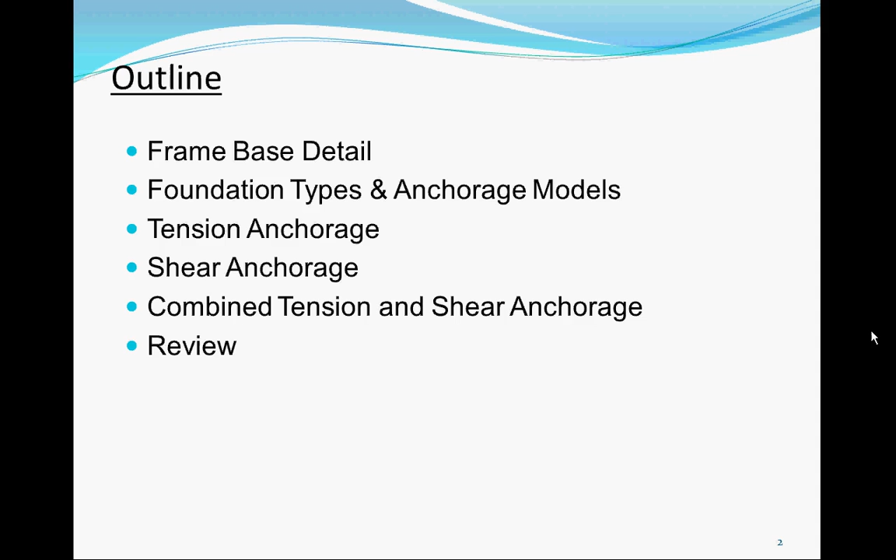Okay, we'll do the frame base detail, and then followed by the different foundation types and anchorage models. We'll see what we do with tension anchorage and shear anchorage, and then how we handle combined tension and shear. Okay, and then followed by review.

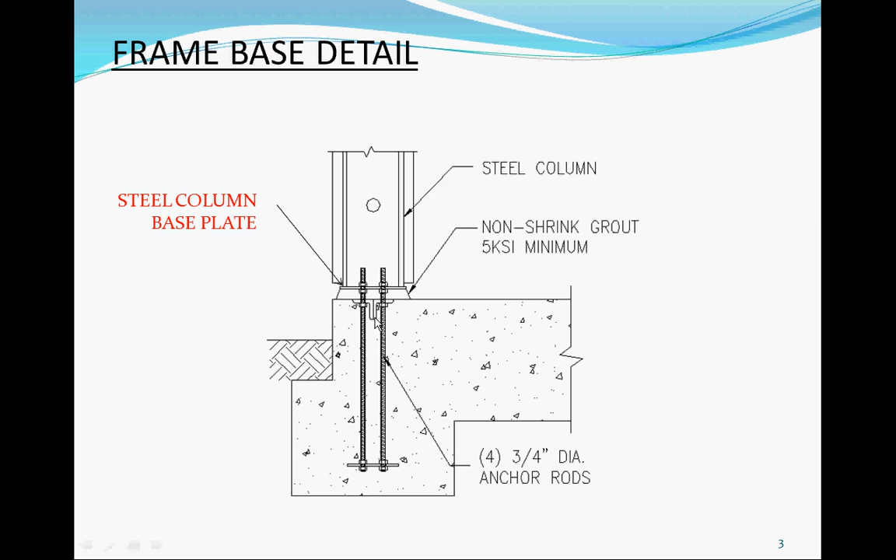So our frame base detail is what we're trying to do, which is basically anchor our frame down to concrete. The basic setup for the SMF is four 3/4 inch diameter anchor rods. We have a non-shrink grout underneath the base plate. Okay, here's the steel column, and here is the steel base plate. So there's a grout underneath it. This is the angle that I was talking about. You guys just saw, depending on what model, this would or would not be there. And the purpose of it is for shear, and I'll go into that when we do the shear anchorage.

So for the base plate detail, we try to keep this somewhat close to 3 inches. Again, we mimic the pin behavior, like what we talked about. The holes are typically 1 inch. These patterns are 3x3. However, on one project we had a big column, and the web was pretty thick, so we actually had to spread this out to, instead of 3, I think like 4 or 5. This column was like 12 inches or something; it was very wide when we had to size it. So this dimension, you could probably keep at 3. Go in that direction. If you detail it, then they will fabricate whatever you need.

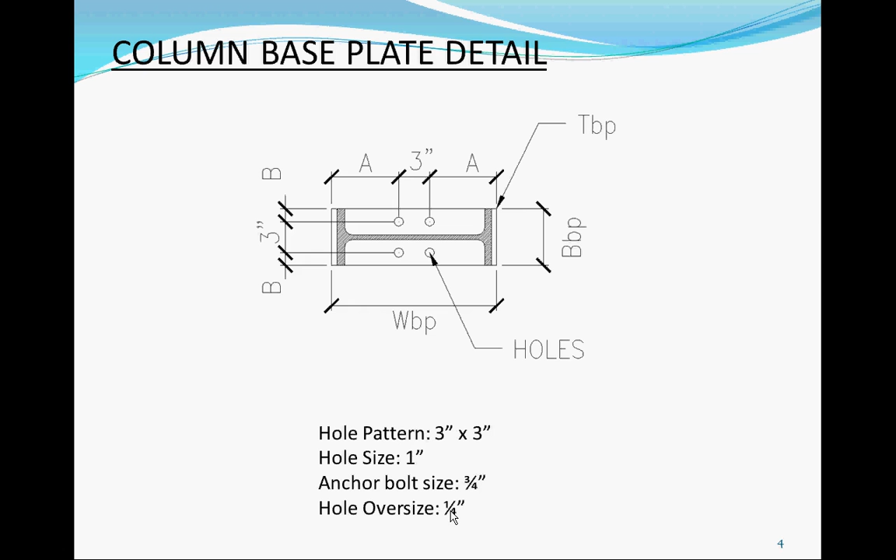Okay, so the basic pattern is 3x3. The hole size is 1 inch. The anchor bolt is 3/4, so you can see our holes are oversized by 1/4 of an inch. For a typical bolt connection, not the anchor bolt, but a typical bolt for steel beam and column construction, the hole size is 1/16 over. They allow a bigger hole size for the base plate because of anchor bolt tolerance. Anchor bolts are not always straight, they're always out of tolerance, and they cast it wrong. That's why we also offer a kit, because we want them to be pretty fixed from one to another. So we sell two, one on one end, one on another end. When they cast in the concrete, this is all buried. All they have to do is drop the columns in here, tighten the bolt, and that's good. Okay, so that's the base plate detail for the bottom.

We have a lot of different conditions. This is the slab on grade. This is taken directly from the software. You've seen it before, but I just want to utilize this to show some of the elevations of what they look like.

So for the slab on grade, we have two solutions. We have the MFSL and then MFAB. MFSL, MF is the moment frame. We used to have OMFSL, but we condensed it so we could use it for both lines. So now it's MF, moment frame. SL is shear lug. Shear lug is this thing. I'm calling the angle the shear lug. Shear lug. Yeah, I'll show you the spelling later. It is a lug, so shear lug.

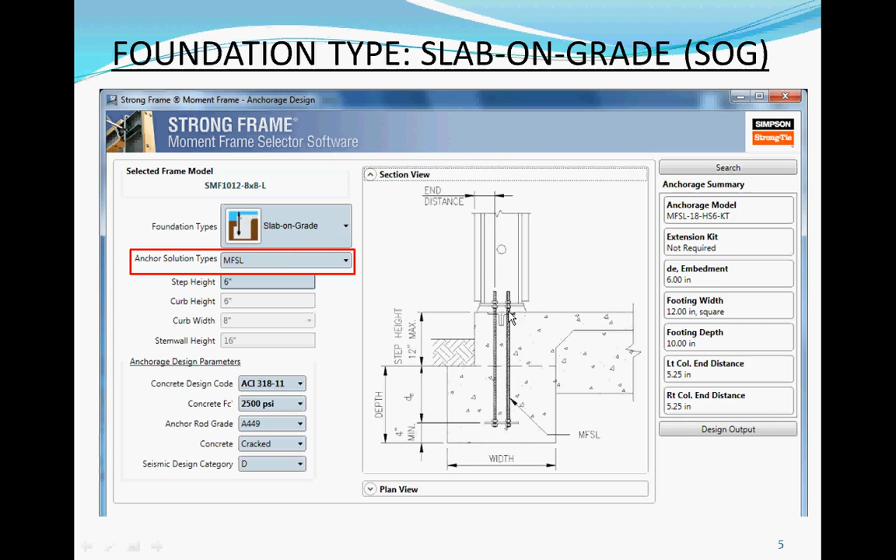Next one is a curb, kind of a garage front or kind of a wall when you're looking at it. When you put it on top, the curb is short. When you talk stem wall, it's a little taller. That's why we have a couple of differences.

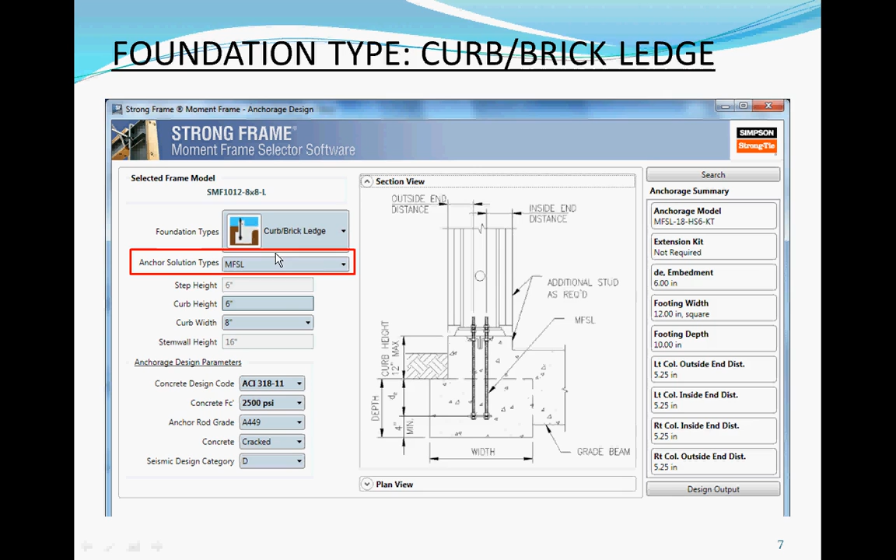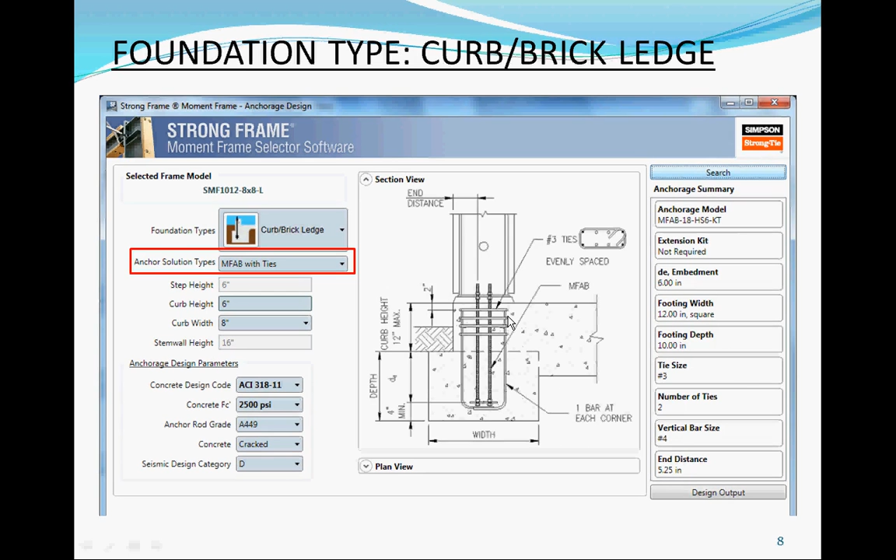So MFSL as well, and when you have a tall curb, now you're not only transferring shear per se, we're looking at it as a kind of cantilever column, almost a little concrete column. Then you're looking at, especially when you're bearing in that direction, compression a little bit, and your concrete is not helping. This is your tension rod. Now I'll go through and see how we actually calculate some of these anchor capacities.

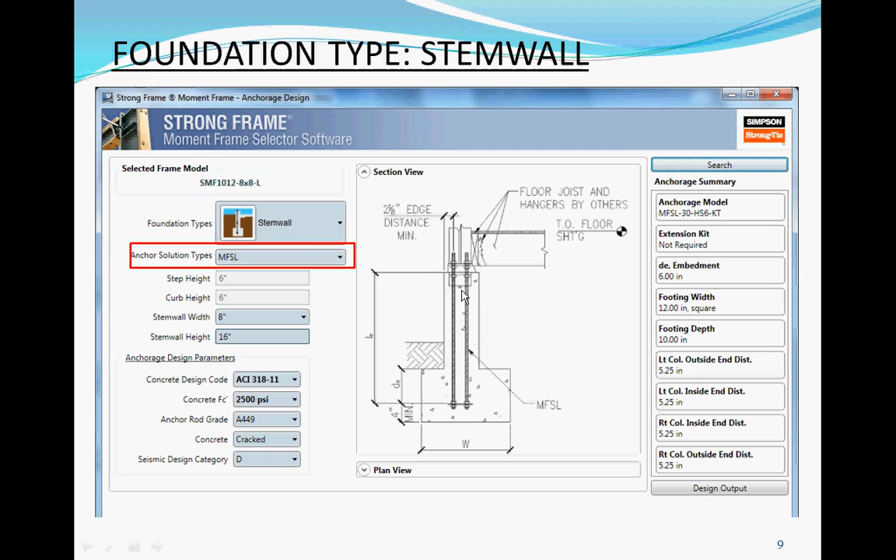For your tall ones, a stem wall. Stem wall is very tall compared to your curb. They start out with like 30, 36, 48 inches, whatever, or even more if you do it for a basement wall. So on this one, we only offer the MFSL solution because the ties and the wall bars, they could probably use it and account for the wall bars for the shear transfer. So we only offer this one. Two solutions: the MFAB,

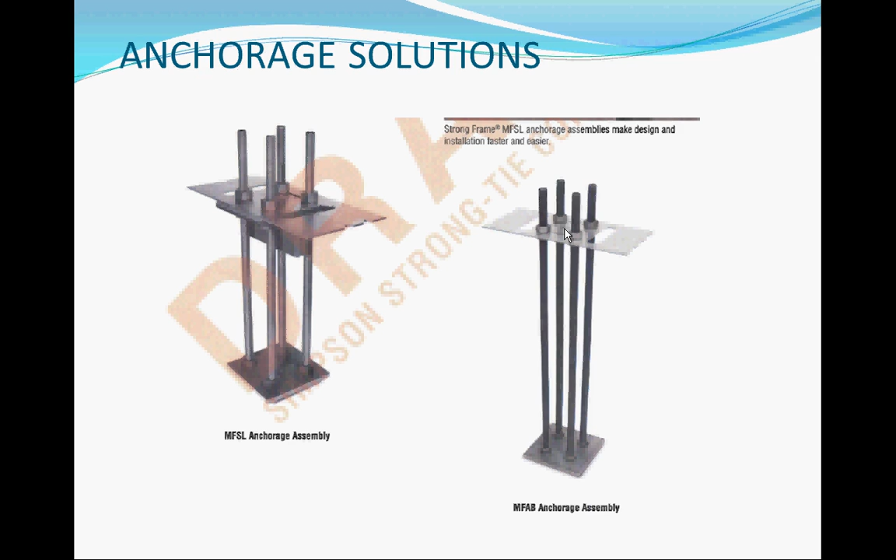MFSL, as you see, very much similar, except for the only thing on the side, the placement for the job site. So we have some slots here. There's only one slot now, the center slot. They actually take a measurement from one end, then from another end, to locate their center spacing. And this one you don't see because somebody put a plate on the top, but you can also use these as handles to carry it. So that's what they are locating.

I'll cover tension anchorage first, followed by shear, then tension and shear. For tension, essentially most of the components are per ACI 318 Appendix D. 2008 or 2011, I don't think there's much difference for our concern, so I'm just going to say ACI at this point. The first one is embedded plate bending, and that's the AISC calculation. The embedded plate is the bottom plate down here.

So we're pulling on it. That's bending. If you imagine this plate to be wide apart, when you pull on it, the plate is going to bend. So the first mode is bending per AISC. The second mode is the steel capacity. The third is concrete breakout, followed by pullout and side-face blowout. All these are directly from ACI 318 Appendix D.

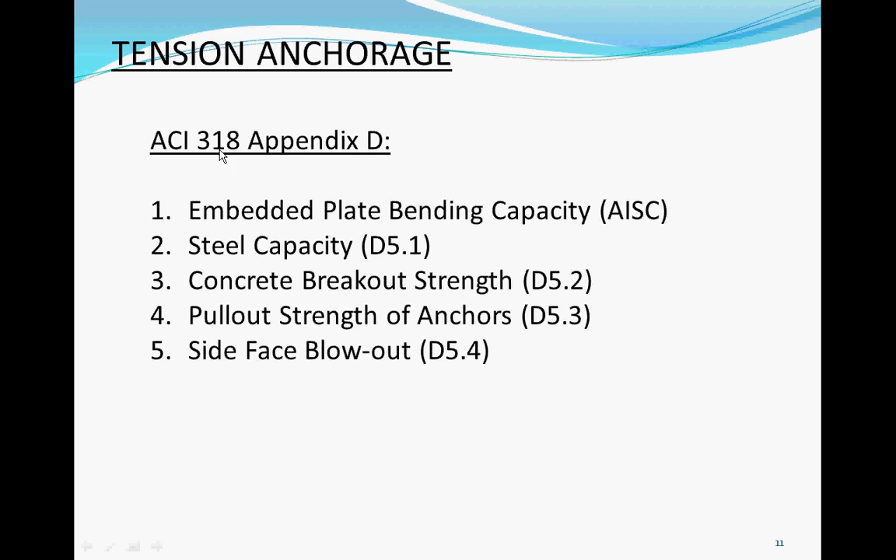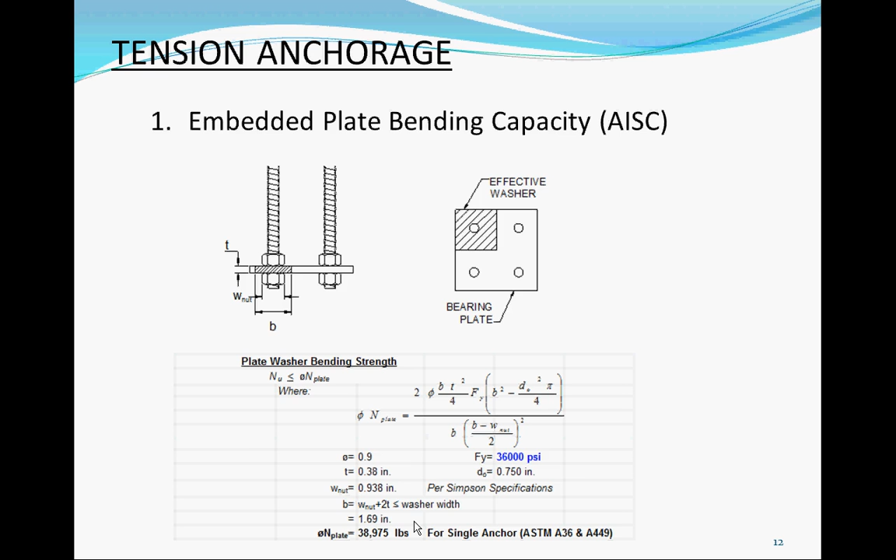The first one, capacity in tension, is the embedded plate. What we're trying to do is treat it as a kind of standard washer. We have an equation to calculate it, and then here is the load per anchor. We have a 3/8" plate, so it's actually 0.375, and these plates are A36, so grade 36, and the capacity for this per anchor is 38, almost 40,000 pounds. So times 4, it's a lot of capacity. This mode does not control compared to the other modes, but we still have to show the calculation and the capacity.

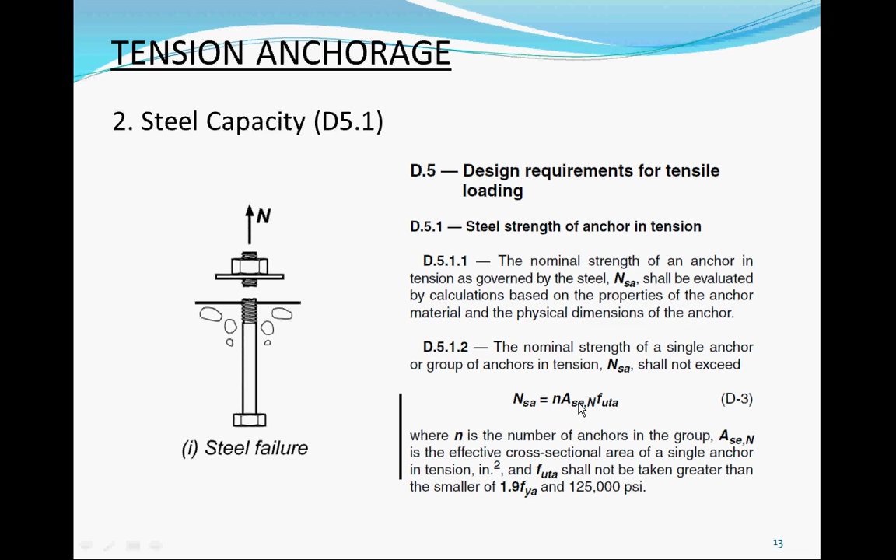The second mode of failure is steel capacity. This is directly from ACI, just showing you what they are. So 5.1 is steel failure, and basically it's N times Ase times futa. The difference between ACI and AISC is that for this A, you have to account for the thread, so they publish that area, versus AISC, when they say bolt, they just account for the non-reduced area. These are the two differences between the two agencies in how they view the area. For Fu, ACI does not reduce by the 0.75, so whatever Fu they publish, you use the true Fu. So pretty easy: number of anchors times effective area times futa is your Nsa. That's the steel.

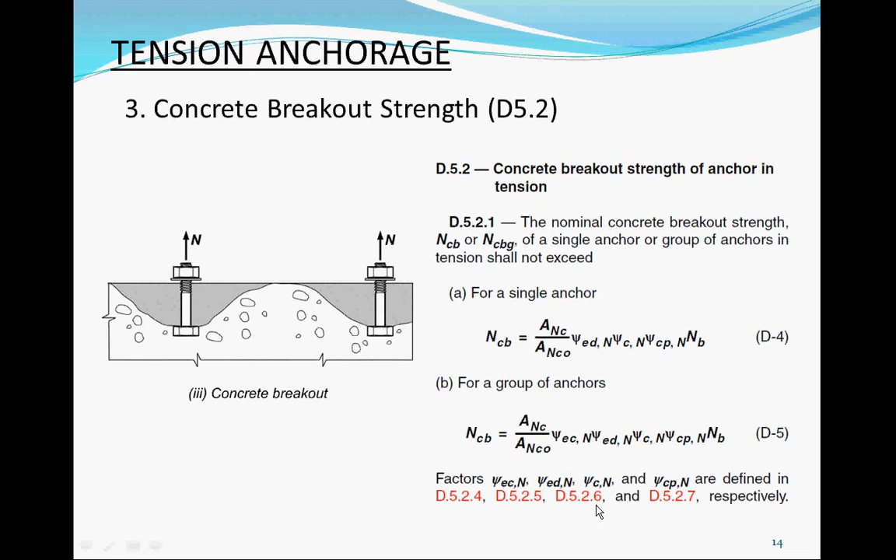Concrete breakout is when you're basically breaking out the concrete. This is a lot more involved, with a lot of factors associated with spacing, group behavior, and all that. So that's D 5.2.

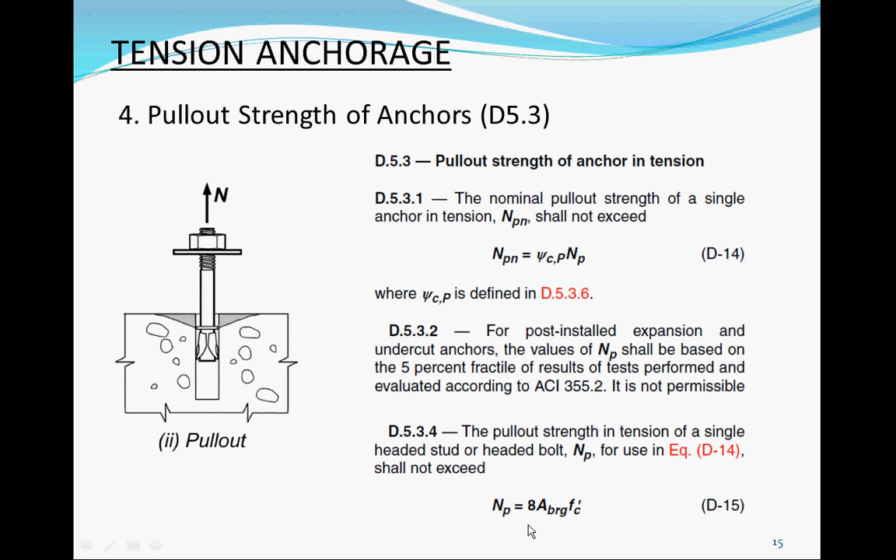5.3 is the pullout. For pullout, basically the NP for a single headed stud, they give you an equation for what that is.

For blowout, 5.4, if you're close to the edge, this could come out. That's blowout. For shear anchorage, okay, that's it.

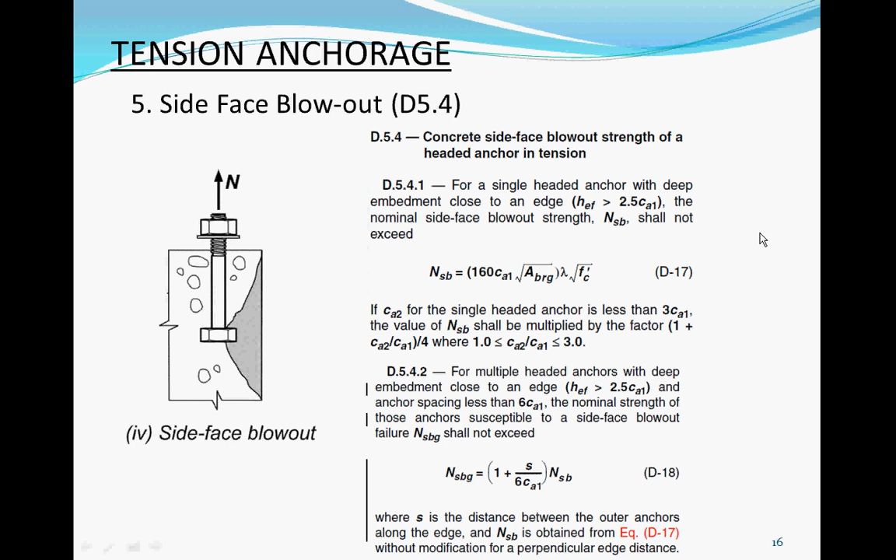I didn't show you how to calculate, but we also have a spreadsheet embedded into the base plate design, so you could take a look at it to make sure it works. It hasn't been back checked, it's just for my own calculations.

For the shear lug anchorage, you have AISC Design Guide 1 for the shear lug, so MFSL is that. MFAB stands for moment frame anchor bolt, so no shear lug - very innovative naming.

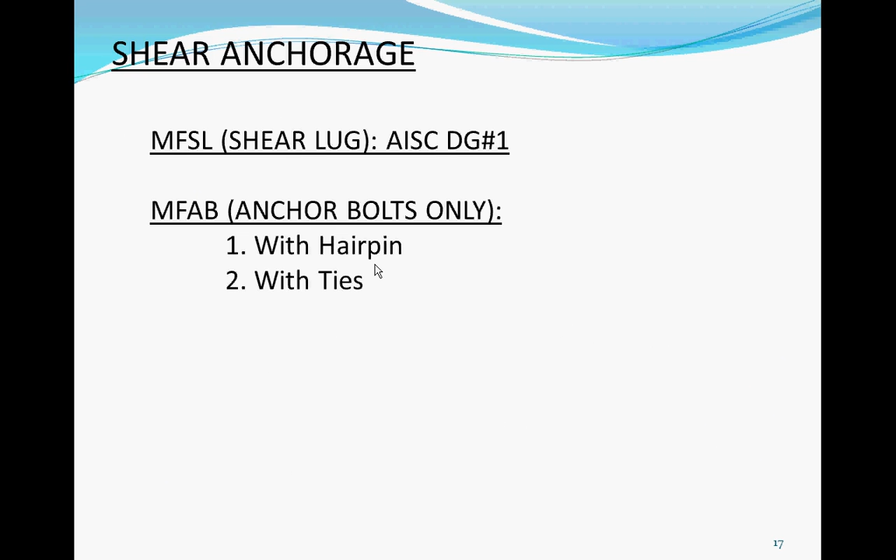Anchor bolt only - this solution you could do it with hairpins or with ties. Hairpin is when you bend it in the field, in the slab. They call it just a pin, like a loop - we'll see what it looks like. And then this is ties, ties usually tie around.

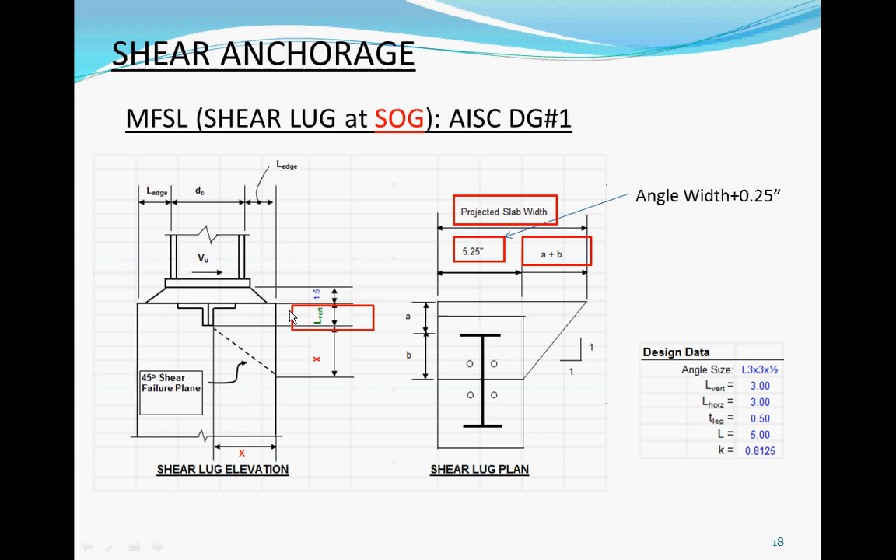For the curb, it's pretty similar. Instead of projecting out, we're limiting this to the width of the curb. So you can't go more than the width of the curb.

For shear anchorage, like I said, we have a design spreadsheet that takes care of it. You'll have to adapt it to your design - I'll show you what to do. Maybe even update some of these like OMF numbering on the spreadsheet.

So calculate the effective width, calculate your design guide with the bearing, the pressure, X, the edge distance. Here's the shear area, AV. We have step by step that spells it out, and on the bottom I'll show you in the spreadsheet - it's easy to read. We have all these noted, step 1, step 2, across to show how we got those capacities.

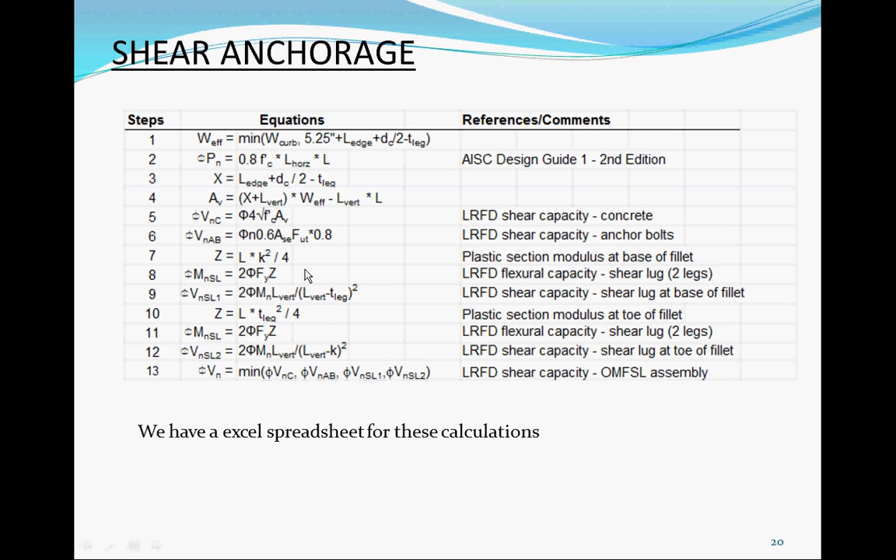So we check the angle at the base of fillet, we check the angle at the toe, and then we check angle bending capacity. Basically, all these checks are per Design Guide 1 and AISC 360.

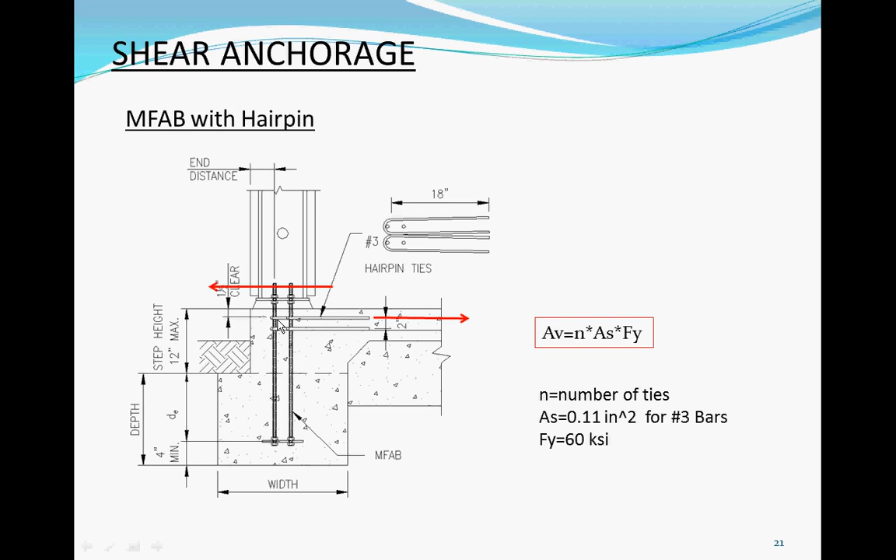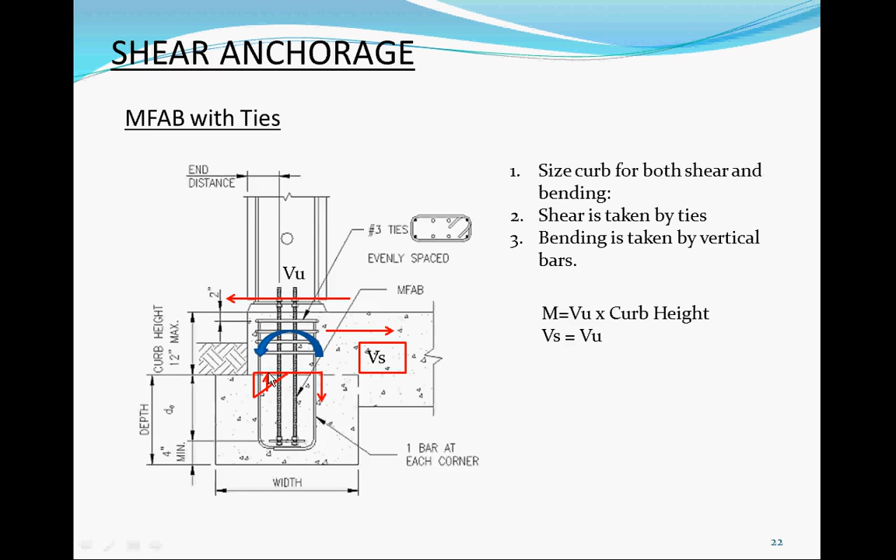And I'll show you a blow up of what that D would be, the lever arm we're talking about. So that D is from the edge of this, if you look at this side, it's the same thing, to the vertical bar. That is the D. S is the tie spacing between this.

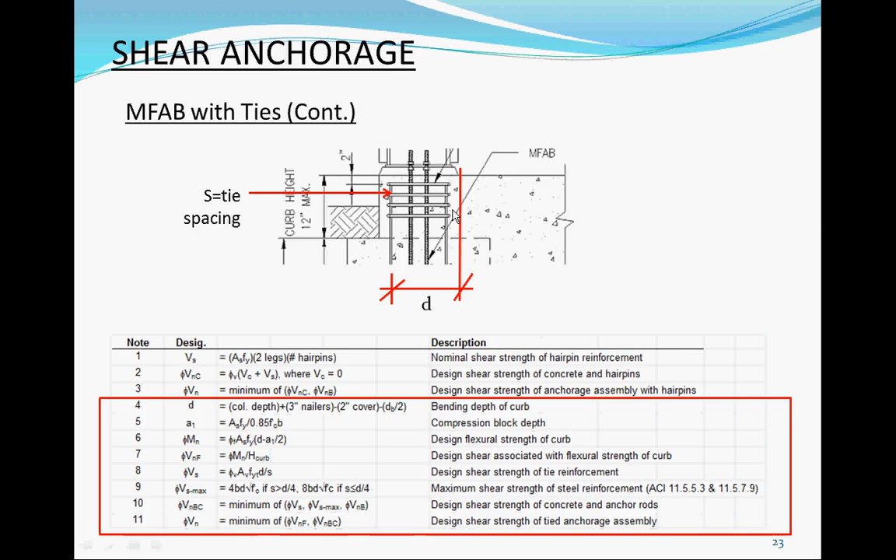Shear and tension anchorage is a tough one. Our default right now is we don't deal with both shear and tension. We assume the tension cone to be in the footing. Assume your shear to be taken by the slab. So as long as you get your shear into the concrete, that's taking the shear. Tension is taken care of by the footing. Assume no interaction between the two. What that means is the failure cones do not overlap.

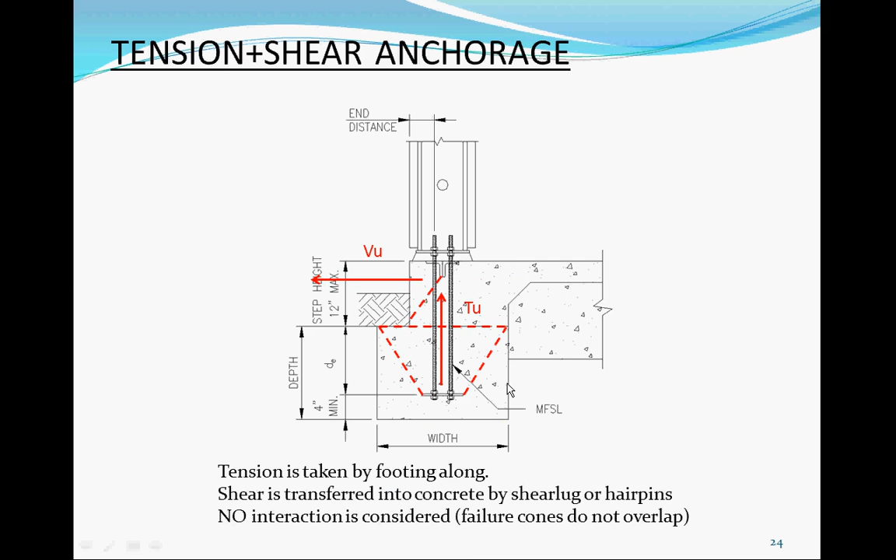What happens if they do overlap? If your failure cones do overlap, then we recommend using supplemental reinforcing per ACI. What that supplemental reinforcing is, is what's per ACI. We have a spreadsheet that does this one, and once you put in supplemental reinforcing, then one of the failure modes you don't have to consider. It's this one: the design strength of the anchor reinforcement shall be permitted to be used instead of the concrete breakout strength when you're calculating shear. So you could reinforce that, and after you reinforce it, then you could probably check tension and shear interaction. You still need to check it, obviously, but right now our default is this. But if somebody wants you to check that, then yeah, you could still do it, but we'll need to provide some supplemental reinforcement.

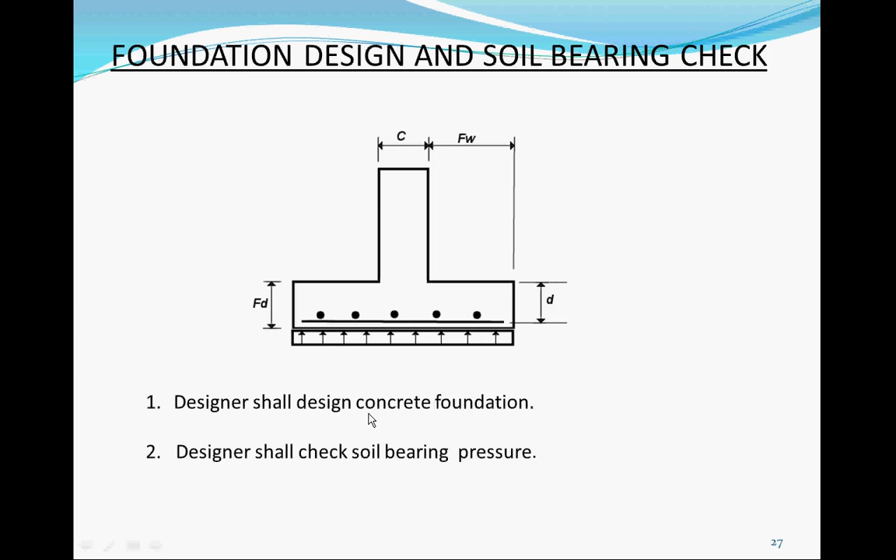Bearing pressure and footing design. We don't know what the bearing pressure is. A lot of engineers try to ask us to design this for them, and we keep saying no. So we leave it up to the designer to design a concrete foundation, and also for the designer to check the bearing pressure.

Do you guys need to get in right now, Jim? No, we'll be done in 5 minutes on this, and then we're going to move out.

Right. So, review. Right now, Simpson Strong-Tie offers two types of anchorage, MFSL and MFAB. The SL comes with the shear lugs. The MFAB requires field-installed ties or hairpins. Anchor tension and shear of the anchor bolt were calculated as part of the base plate design. Remember, when we check the anchor bolt above concrete, we check both shear and tension, so we do consider interaction between shear and tension. But when you get to the concrete, it depends on what the concrete footing condition is. The failure cones might or might not overlap at that time. So our default is we assume they do not overlap and give you the capacities of both tension and shear, and to check that.

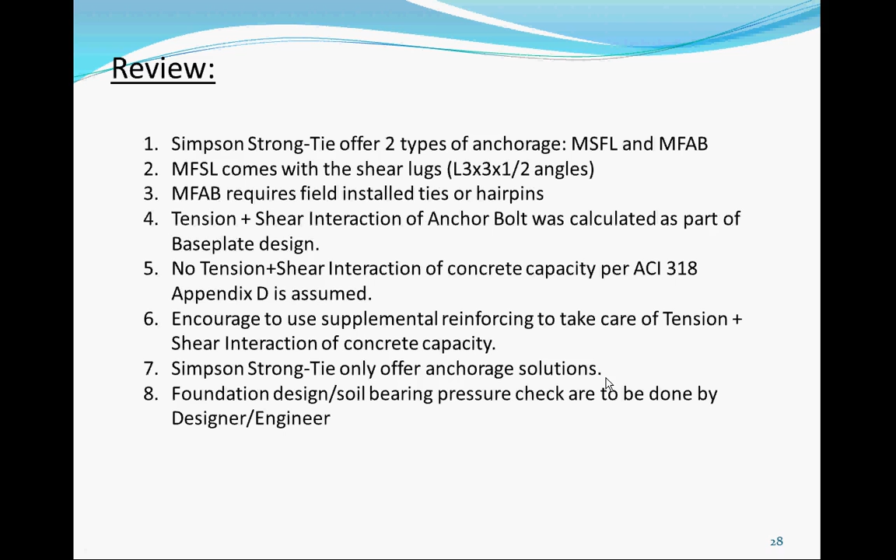However, if they do overlap, you should take care of it. We recommend they take care of it with supplemental reinforcing. So no tension-shear interaction capacity is assumed. We encourage the designer to use supplemental reinforcement to take care of the tension and shear interaction of the concrete capacity. We only offer anchorage solutions. Soil design, foundation design, and bearing pressure check should be done by the designer. So when we say we only offer anchorage design, we would tell them how thick the concrete, how wide the concrete, how much embedment. But that footing, they need to check the bearing pressure. If the bearing pressure check increases by quite a bit, then they would have to design the footing themselves. That's pretty much anchorage design, and I'll show you our anchorage design Excel spreadsheet now.

See you guys later. See you Monday. Sure. Yep.